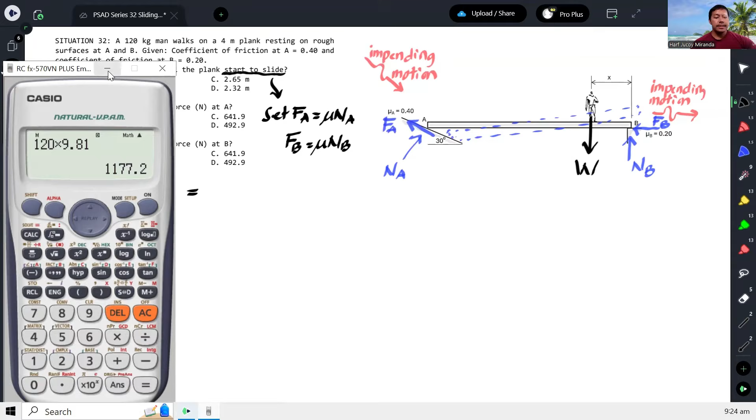So let's start with summation of, siguro let's do summation of forces muna. So if we would do summation of forces, let's start with Y. Summation of forces Y is equal to 0, assuming upward positive. We have downward yung 1177.2, tapos upward yung NB, tapos etong NA meron niyang Y component.

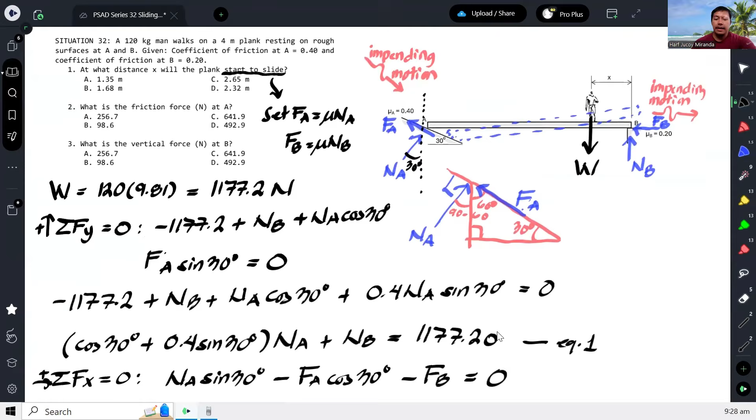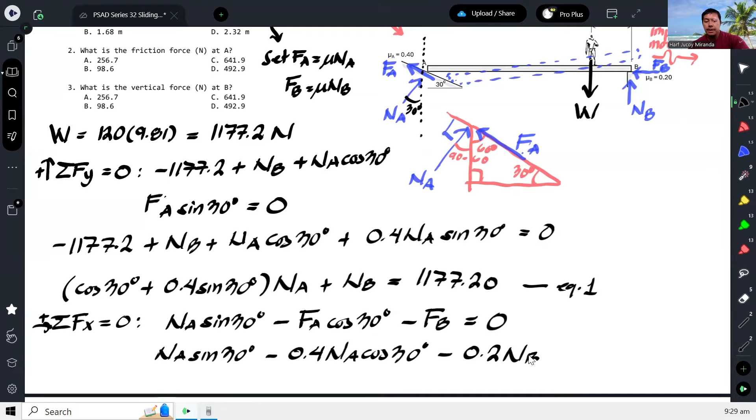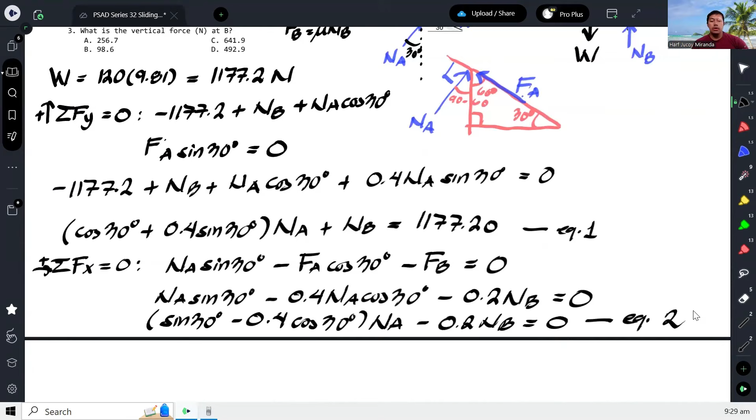So we have NA sine 30 degrees minus 0.4 NA cosine 30 minus yung FB, ang mu sa point B ay 0.2. 0.2 NB. All equal to 0. And again, kapag nire-write natin to, we have sine 30 degrees minus 0.4 cosine 30. So, finactor out ko lang yung NA and then yung NB, okay na to. So, kaya ako sineset up ng ganyan kasi kung mapapansin nyo, this is two equations with two unknowns na linear and we can use our calculator to solve these two normal forces.

So, go to mode, equation. Two equations with two unknowns. So for equation 1, we have cosine 30 plus 0.4 sine 30. Tapos 1 and 1177.2. Sa second equation, we have sine 30 minus 0.4 cosine 30. We have negative 0.2 and then 0. Okay, so our NA is 641.88. And our NB is 492.93. Okay, and actually, dun sa isa sa mga tanong, pinapahanap yung vertical force sa B. So dito sa number 3, ang sagot natin ay ito, for number 3.

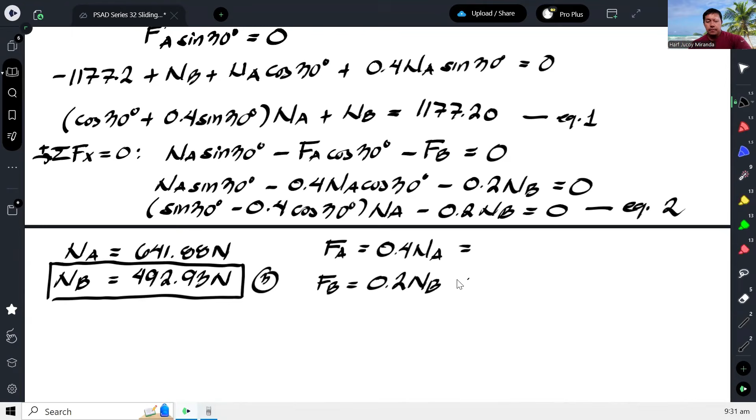Okay, so 492.9. Okay, next, obviously, dahil meron na tayong NA at NB, makakompute na rin natin yung FA. Kasi di ba ang FA ay 0.4 lang naman ng NA at yung FB ay 0.2 ng NB. So compute natin both. So mag-round off na lang ako. 641.88 times 0.4 gives us 256.75. And then yung FB natin, 0.2 of 492.93. So 98.59.

Okay, and sa number 2, ang tinatanong friction force at A. So ibig sabihin, ang isasagot natin dito is ito. Ay, sorry. A pala. For number 2. That is 256. Ayan. And then lastly, yung number 1, what distance will the plank start to slide? Bago ako mag-proceed doon, gusto ko lang din i-emphasize na pwede natin na pagsamahin yung mga reaction sa surfaces na A and B. So ang tawag ko dito, total surface reaction. Ang total surface reaction is basically yung resultant lang ng normal force tsaka frictional force. And probably nakikita nyo na rin yung ganitong solution na kung saan pinagsasama ito.

Okay, so yan yung reaction sa A. Na equal lang sa square root of NA squared plus FA squared. Ganun din dito. Kung gusto mo yung total reaction dyan sa RB, that is square root of NB squared plus FB squared. Kung gusto mo lang na pagsamahin. Or kung tinatanong niya, what is the total reaction at A? Ito yung sagot natin dapat. What is the total reaction at B? Ito dapat yung sagot natin. Pero hindi naman tinatanong, so we will not calculate that. Just in case lang na yun yung variation ng problem.

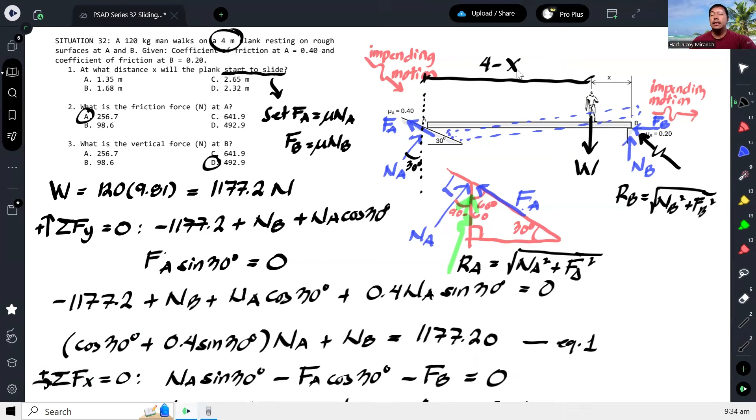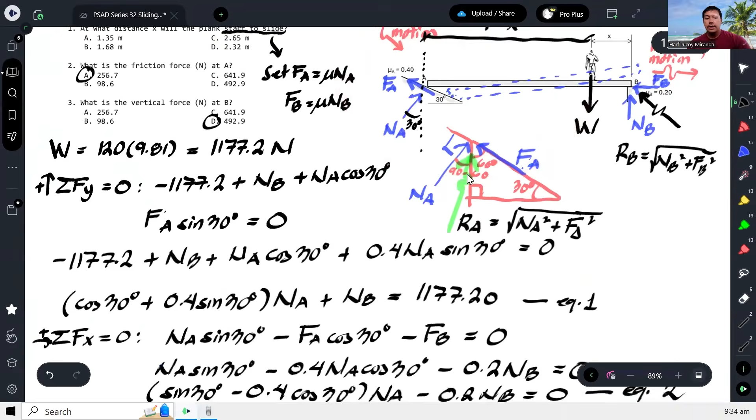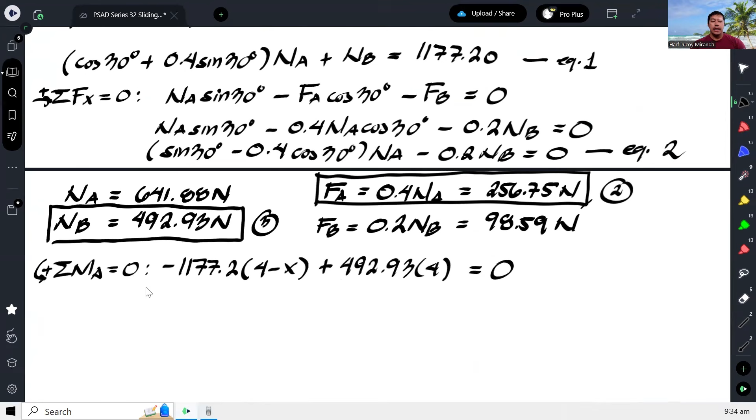Okay? So taking summation of moment at A is equal to 0, assuming counterclockwise positive, we will have W, which is 1177.2 times 4 minus x. Ang rotation niyan ay clockwise. Ganito. Tapos yung FB, hindi naman iikot kasi dadaan lang siya dun sa point of rotation. Ang NB lang yung iikot ng counterclockwise na may moment arm na buong length ng plank. So NB times 4, ang NB natin is 492.93 times 4 equal to 0. This is plus. And from here, we should be able to calculate for x.

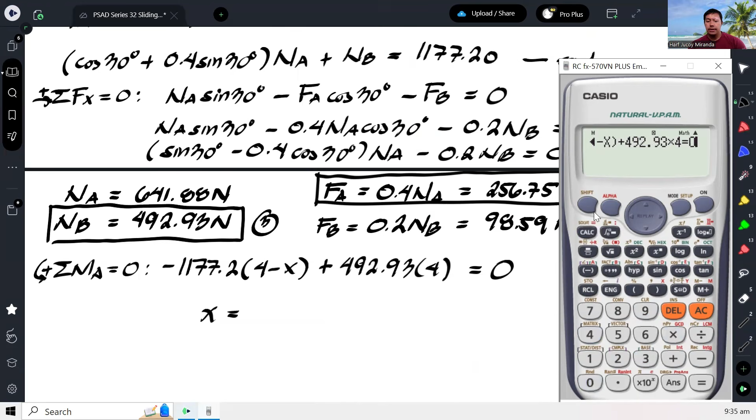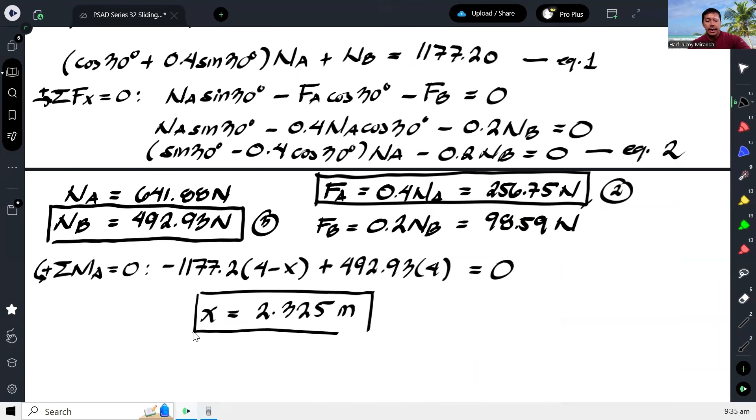So shift solve ko na lang, negative 1177.2 times 4 minus x plus 492.93 times 4 equals 0. So x is 2.325. Okay, so when the man is at x is equal to 2.325 meters, the plank will start to slide. So in our choices, we can choose letter B. Okay? And basically, that's how we solve this particular problem.